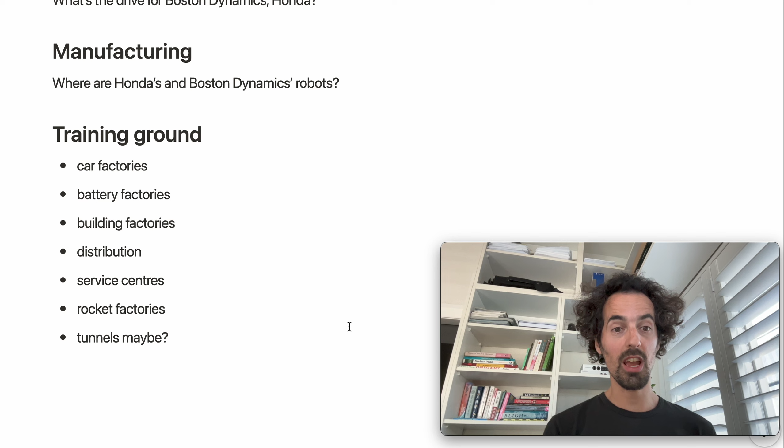They have factories for cars, which have big components. Battery factories have small components, like tiny batteries. They actually build the factories themselves, so they build the building, which is a whole different scale. They can potentially train the bot to do some construction tasks too - that's insane. They have distribution, like shipping cars around. They have service centers, which potentially means interacting with people at some point. They have rocket factories. Maybe they will use them in the Boring Company too. Who knows? The point is they have so many internal use cases that they can use to really work and develop this bot and fix any problems they find.

Which I'm not sure is the case for Boston Dynamics. If you want to train a Boston Dynamics robot to, I don't know, paint a wall - okay, where do you do that? Tesla has factories, they're building factories, so they can do that.

So I think those are fundamental advantages that Tesla has due to the scale and due to just the sheer size of the company and how many different things they are doing.

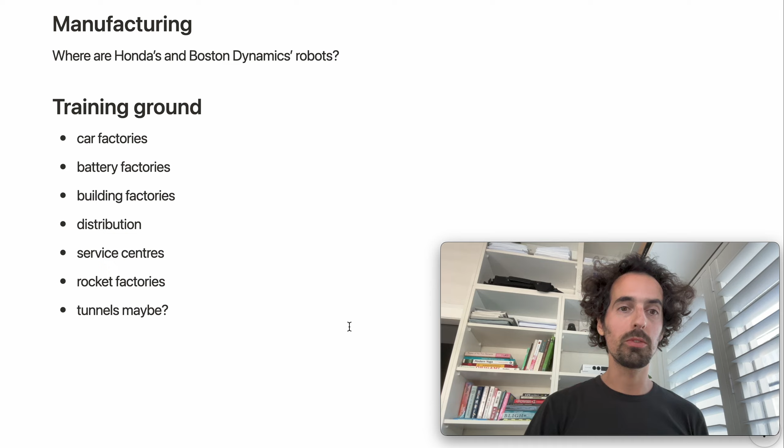So with that out of the way, let's talk about what actually is the bot, because there's plenty of confusion here. Let's start talking about industrial robots. I don't know if you've seen one of these in real life or in photos. This is an industrial robot.

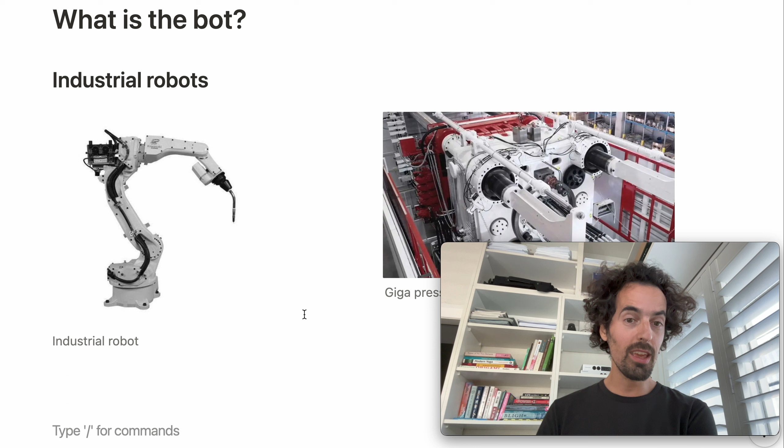It has some sort of arm and a tool at the end, and is designed to do one specific task. Now when you look at that thing, do you expect it to be sentient? Do you expect it to talk to you? Do you expect it to be your emotional companion? No, you just expect it to do one mechanical thing it was designed to do. And that's a relatively simple machine.

It has a couple of degrees of freedom and it can move, but it's relatively simple. And then you have really complex machines that you can think of as robots because they're automated too. This is the GigaPress, for example. It's huge and very sophisticated. But would you expect that machine to have a relationship with you? Would you expect it to be your friend? No, it's just an industrial machine. It's designed to do something.

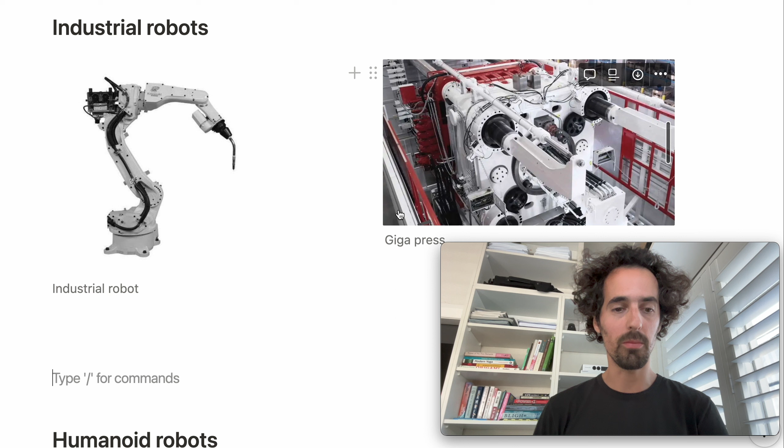And then an interesting thing happens when you change the shape, and you have something that kind of looks like a human. We've seen plenty of examples of this in sci-fi movies - C-3PO, Ex Machina, the Terminator type of stuff. And once the machine starts looking like a human, there's something that happens very deep inside us as humans, driven by billions of years of evolution: we see that shape and immediately associate personality, and we recognize it as a human.

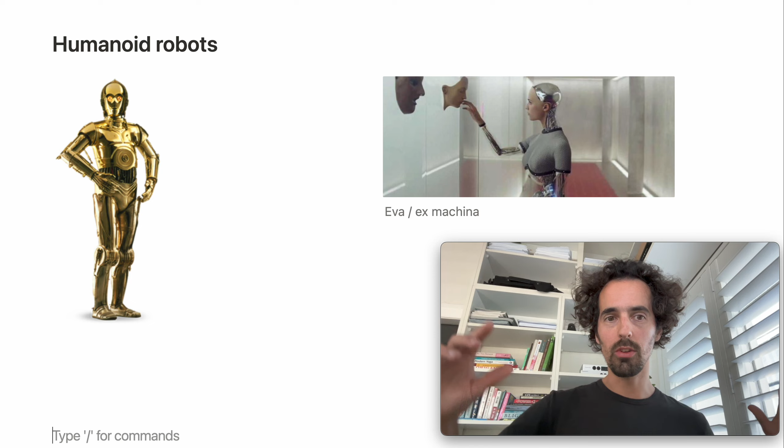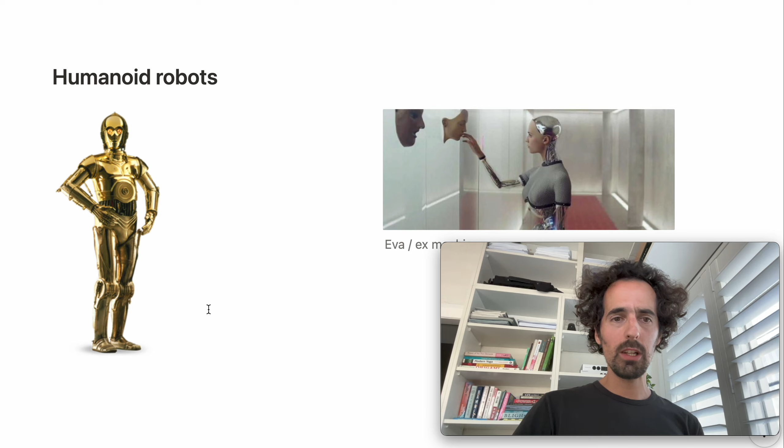And that means we come to expect human-like behavior from these machines. So human-like behavior really opens up the space of things this machine has to be able to do, which is crazy high compared to the space of actions it can actually do. So I was really thinking about that today, and I realized the Tesla bot - it looks like a human, but it's actually a machine.

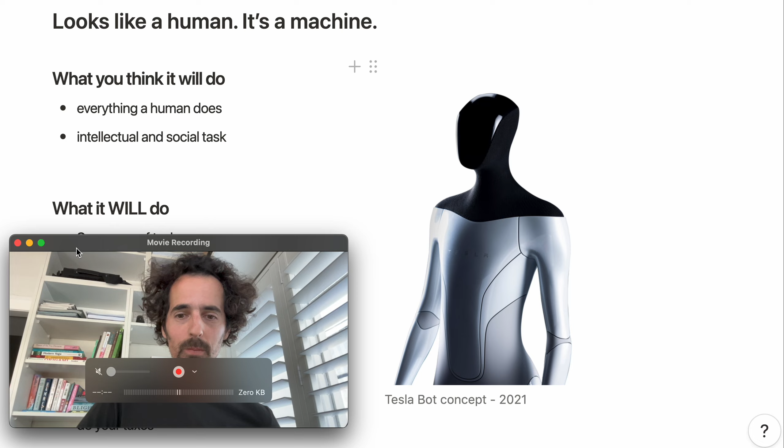So once you change that perception, and start thinking about it like a machine, and reframe the problem, things get really interesting. Because when you think it's a human, you come to expect it has to be able to do everything a human does - social and intellectual things, it has to be your friend, you have to be able to talk to it in natural language and it has to respond. But when you think of it like a machine, you don't really expect those things from a GigaPress.

So this is what I think it will do: a sequence of tasks. You could program it to do simple tasks, and then connect those tasks in sequences. If you think about software, a lot of automation processes are made of simple tasks connected together, and the resulting system is very complex, but it's just made up of simple tasks. I think this bot will be able to do simple things.

Like pick something from here and put it there, open the box, take something out and put it there, and then take the empty box and throw it away. Very simple things, but if you keep adding and programming it to do those simple things, expanding the library of things it can do, you can compound and combine that to do something complex. And the beautiful thing about automation is once you do that, it just does it forever - it keeps working and working, which is beautiful.

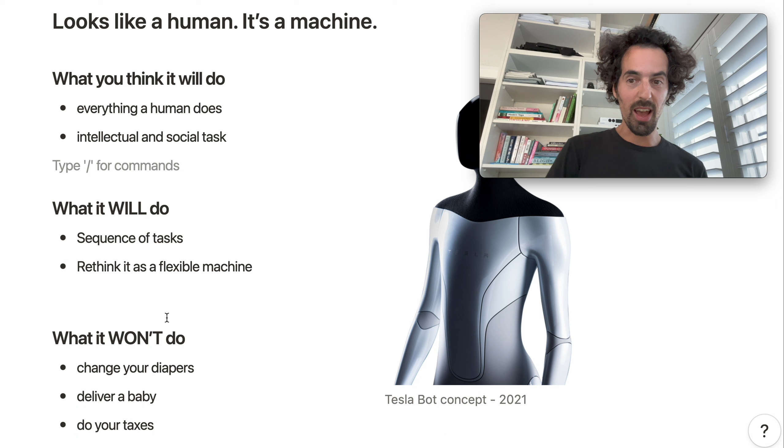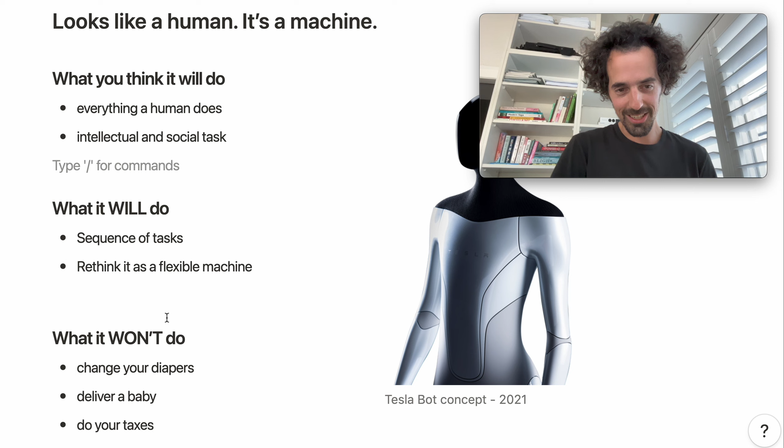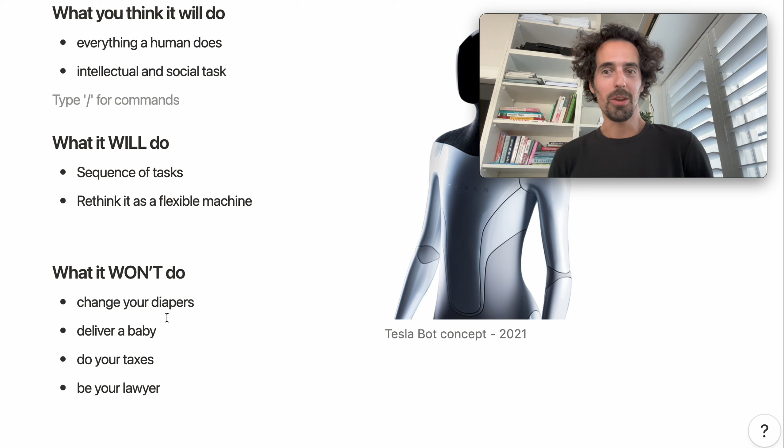So I think that's what it will do, if you think about it like a machine. And it won't do things like help you when you get old. It will not help deliver a baby. It will not do your taxes. It will not be your lawyer. It will not be your friend. It will not be your companion. It just will be a machine.

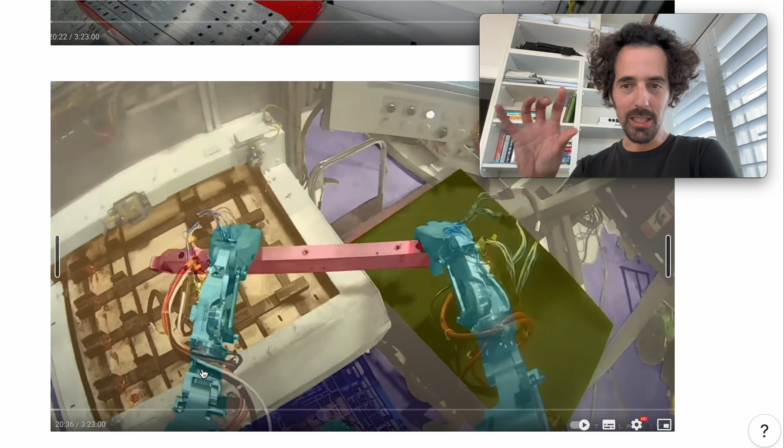To really illustrate the point, they showed this example in the presentation. It was the bot picking a piece from here and putting it there, and you can see all the segmentation, vision stuff, which is pretty cool. But it's essentially a machine moving something from here to there. You could envision a robot like this doing that, and you could potentially create a robot to do that.

Now, the thing that I think is really interesting is that this robot is kind of fixed. What I mean is, it's fixed in size, and when you decide what type of robot to put in a station to move a piece from here to there, you have to think about the hardware—how big does it need to be, how many degrees of freedom does it have to have. So you're designing and iterating in the hardware space, which is slow.

And once you decide which robot you want, you put it in place, you bolt it to the floor, and it stays there forever. If you want to move it, maybe you can, but it can only do certain things limited by the hardware.

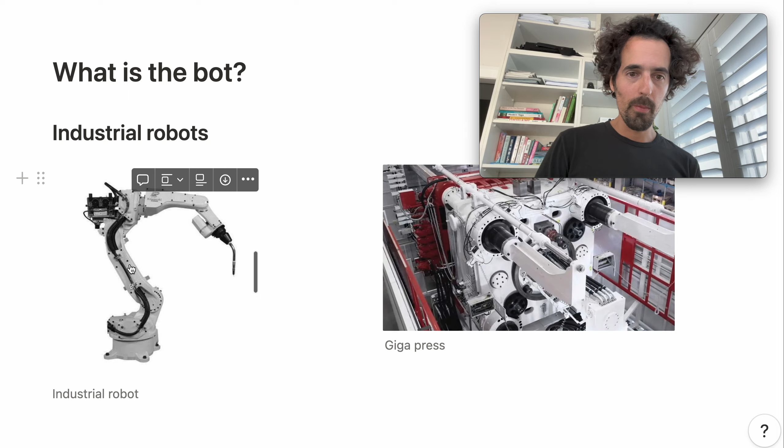Now, if you think of the bot as a machine that's more flexible—to start with, it can walk, so it's not bolted to the ground. It can move a little bit, so the operational domain really grows. When you think about how you program it, you can program it to do different tasks, and you're iterating in the software space in that case, which is way faster than hardware.

So if you need a machine to move something from one place to another, you don't have to think about what machine you want. You just pick the bot, and as long as you can do it as a human, you know the bot will be able to do it because it has the same degrees of freedom and that kind of stuff. So you just go and pick it up, and you don't think about the hardware. Then you start thinking about the software: what are the instructions I need to give the bot such that it does what I want it to do? That really becomes more of a programming type of question.

You're iterating in the software space, which we know is orders of magnitude faster—doing software is way faster than hardware. And then you can potentially change it to a different location later. If you change the object, you can think that the bot will be kind of flexible and understand that this object is a little bit different or a different shape. And then you just can do so many things. I think it's the story of an industrial machine that is flexible.

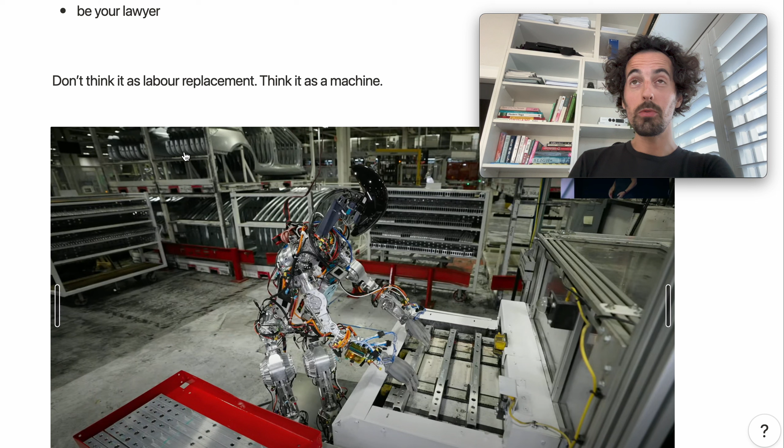So that really changed the way I think about the bot. I used to think of the bot as like this, it stays home and looks after your grandma, or works at a hospital. I'm like, man, that seems pretty far, because this machine has to be extremely good to handle those types of situations. So I was a bit skeptical on the whole bot thing, but this really changed my perspective.

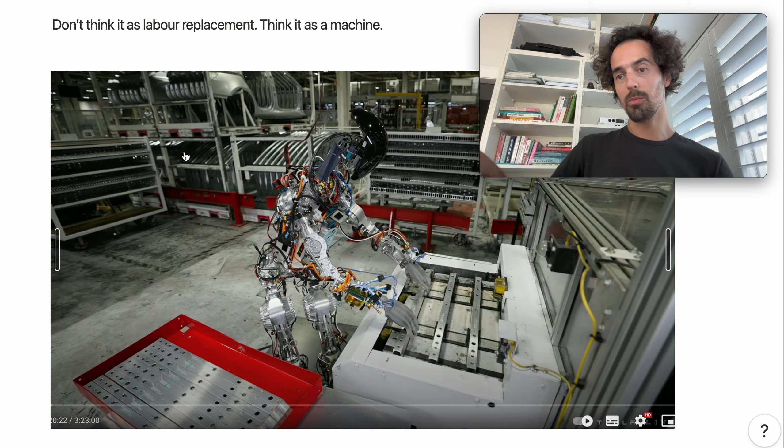Now I think it's like, okay, it's a machine which is very flexible, which you can move from one station to a different station. It just works all day long. It doesn't complain, it doesn't get sick. You just program one, and then you can have 2,000 of them doing the same thing. It's pretty cool. You don't even need to deploy them in a fixed way - you can just tell them, hey, walk there, that's your station, go do it. And then when they are not needed at that part of the factory, you can say, okay, go somewhere else and do something else. So it really becomes quite flexible. And I think that this is the missing link in a fully automated factory.

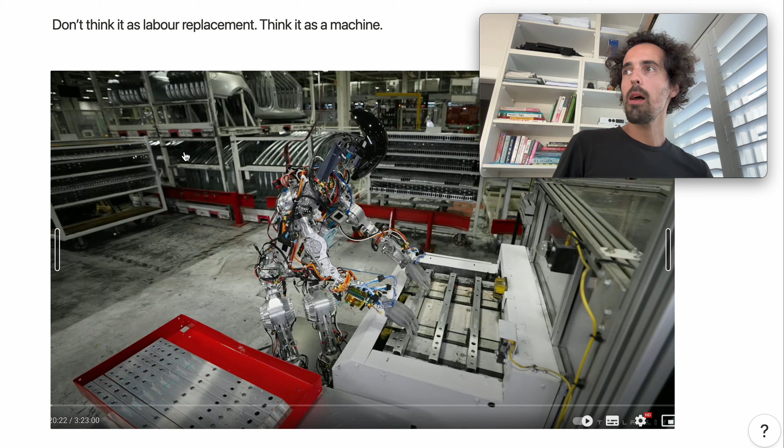Let's talk about factories for a second. So in a factory, you have different processes, and you normally have machines that are designed to do one part of the process. Let's say you're stamping the door of the car, and then another machine is doing something else, like now you're welding the door and stuff like that. So you have these operation stations, and then you need to move the part - you need to load it into one machine, once the process is done, you need to unload it and move it to the next one, and then load it into that machine. So you have machines, you have transportation within the factory. That could be a belted conveyor system, could be an AGV, different ways. But you still need to take it from the machine, put it in the transportation system, and then take it from the transportation system, put it in the next machine. So there's still a bit of loading and unloading process there.

And you can design robots to do that, like little arms that grab it and put it somewhere else. But all of those are kind of custom and very specific to that task. And I think that's where the bot will shine. It will be this glue that brings all the machines together. It will fill in these little pieces with operations that are quite simple, but just boring and repetitive. And you don't want to have a human doing that, because number one, they will go crazy - that's not a good life. Number two, they might not be efficient, that can become a bottleneck. So if you can automate that with a bot that is generic, that would be great.